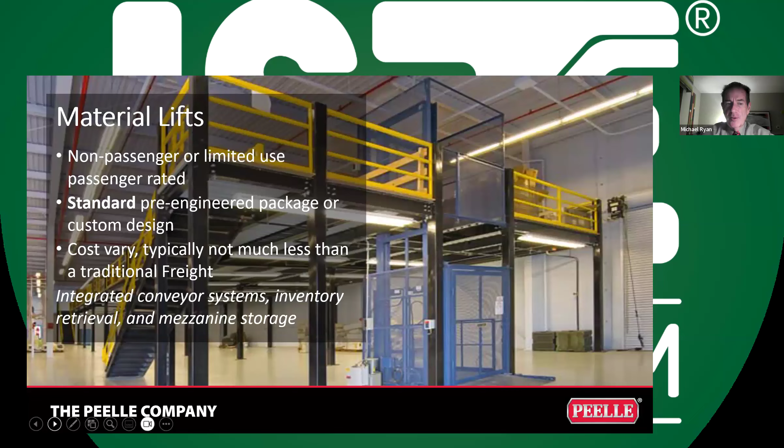Another option to move things is a service elevator or a passenger elevator. Again, these elevators are okay, but they are light duty. They are pre-engineered by the manufacturer. There are three sizes, there are three configurations, there are three colors, and they're very good at moving people. They might be good at moving light packages, but they're really not good at moving freight or things that could damage doors. And then there's the freight elevator.

So obviously, this is our wheelhouse. Freight elevators or goods lifts, they're very specific. They're application specific. What I mean by application specific is, a guy like TAC calls us and says, hey, this is how much of a hoistway I have. This is what I'm moving. This is how much space I have. This is how heavy it is. What do I need here? And then a company like ours says, okay, here's the biggest door, the best configuration for that application.

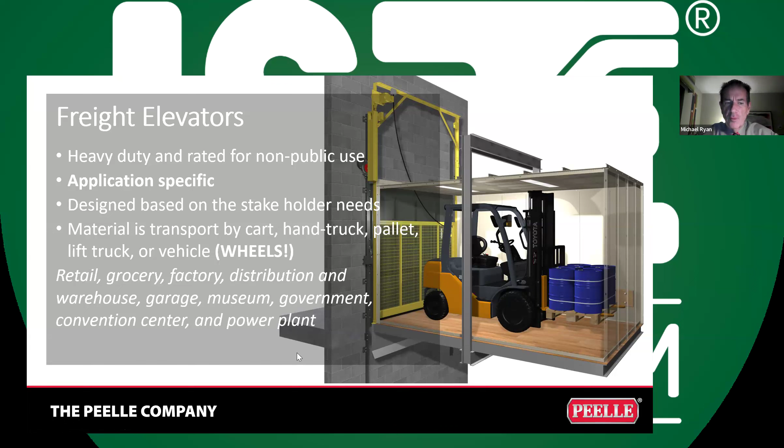And the most important thing for us about a freight elevator is we would say anytime you have a device with wheels, a forklift, a hand truck, a pallet jack, a car, a truck, anytime that you have something with wheels that can hit door panels, if they hit those door panels and those door panels are pushed out of the track, horizontal doors, things that you would see on a passenger elevator, that elevator is out of service. So maybe that wasn't the right door for that application. So that's where the vertical door really has great applicability.

So specifically, if you were to choose the vertical door, what values do you get from the vertical door? So we talked about where we're seeing the vertical door. We talked about who has to maybe supply or specify the vertical door, and what do you really get with the vertical door? So look, the vertical door all comes down to most shutdowns are related to doors.

So when you specify a freight elevator or goods lifts with vertical doors, it's because the owner, the tenant, the manufacturer, whoever's in the building wants the most uptime for that elevator. They can't live without that elevator. If those doors get damaged and they're out of service and they can't move their material, they can't move cars, they're really in a bad spot. So that's why the vertical door is specified. We want to maximize uptime. The material being loaded is heavy, or the class or the size of the material, and it's critically important that that elevator provide good use.

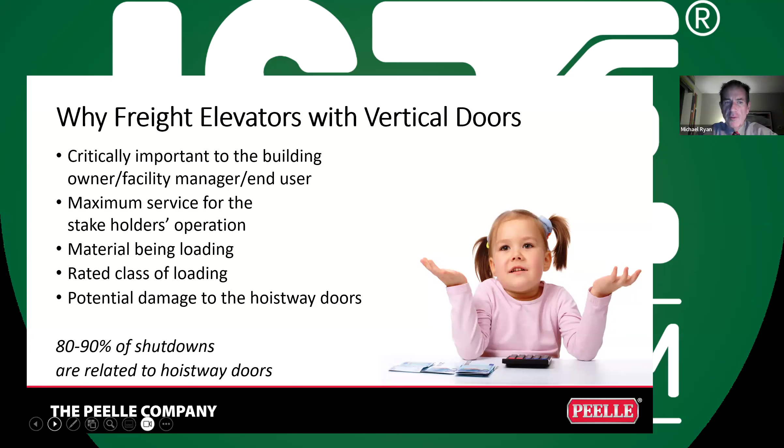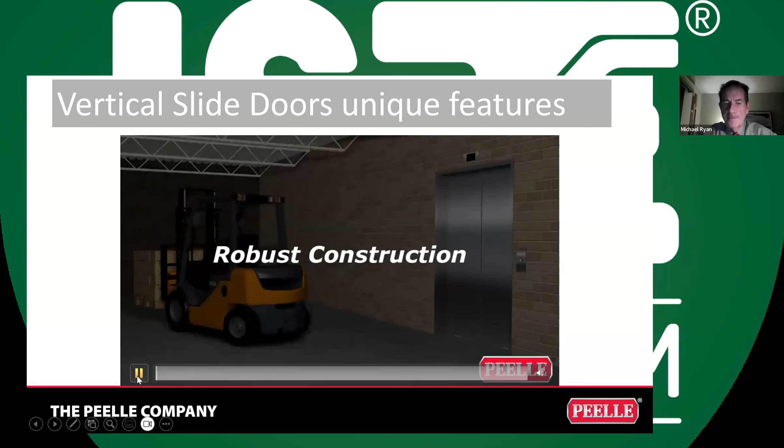So I'm just going to run a short video to show you the 6 major benefits that you get with a vertical slide door. Robust construction. Horizontal sliding doors are designed primarily for light-duty applications. This can result in damage due to incidental impact from loading, misuse, and abuse. Vertical sliding Peelle doors are designed specifically to the capacity and loading method of the elevator and are heavy-duty and reinforced to accommodate hand truck, pallet, and forklift loading.

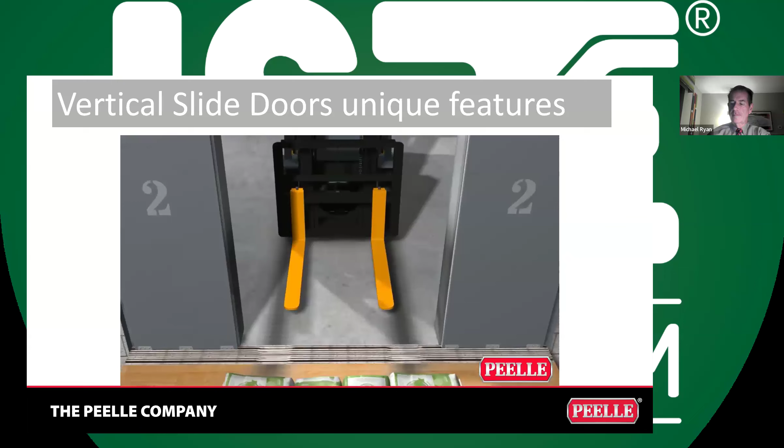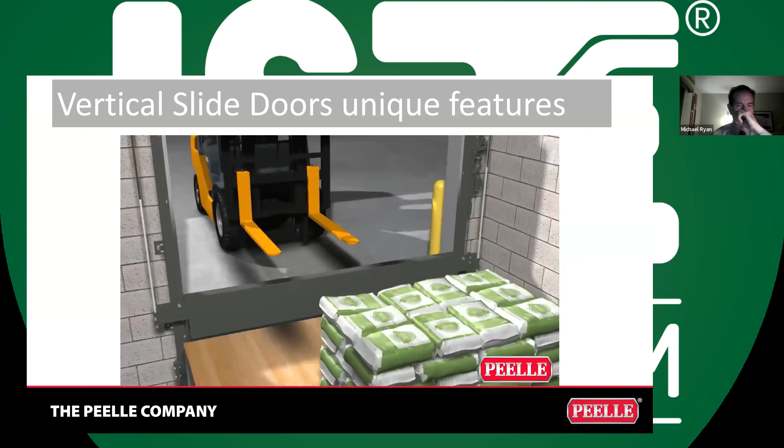Truckable sills. Horizontal sliding door sills are subject to damage, premature wear, and debris which affect door performance. Vertical sliding Peelle door truckable sills are designed specifically to the capacity and loading method of the elevator and are flat to allow smooth loading. Door guides are located in the hoistway, running vertically so they are not damaged during loading and debris cannot gather in the door guides.

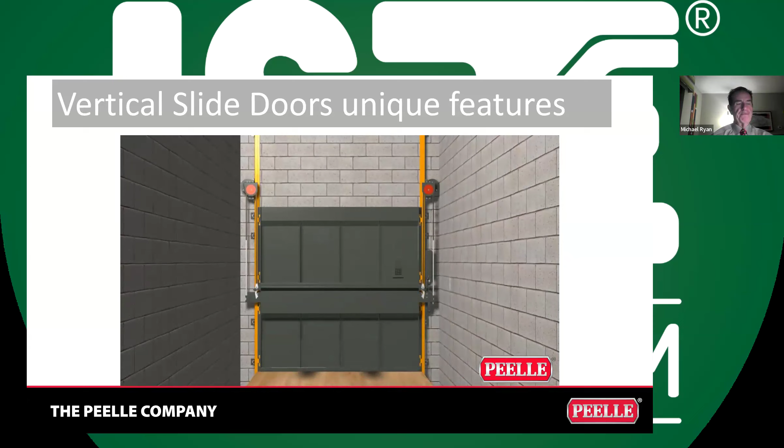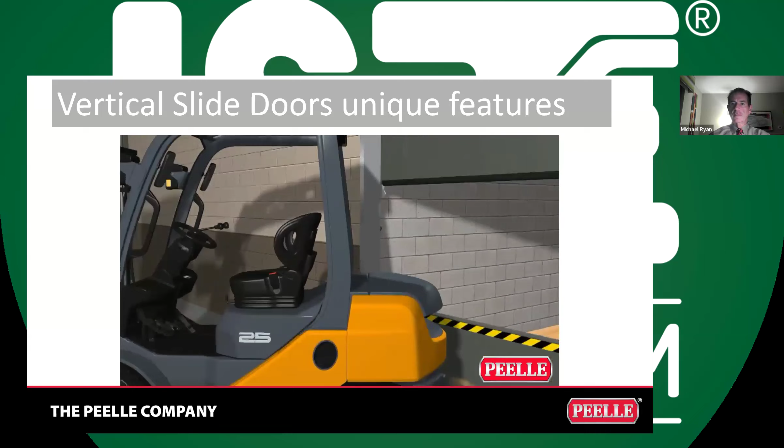Independent locks. Horizontal sliding doors, which sustain a high impact, may also suffer interlock misalignment, causing a shutdown. Vertical sliding Peelle door interlocks are independent of the panels and are located away from the opening, and thus protected on the door guides.

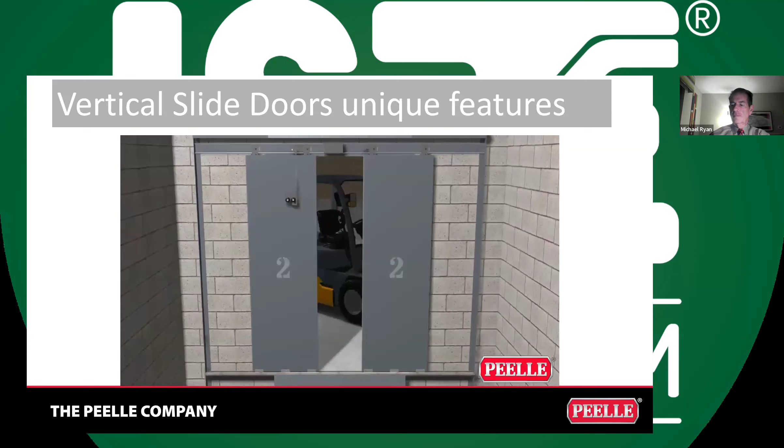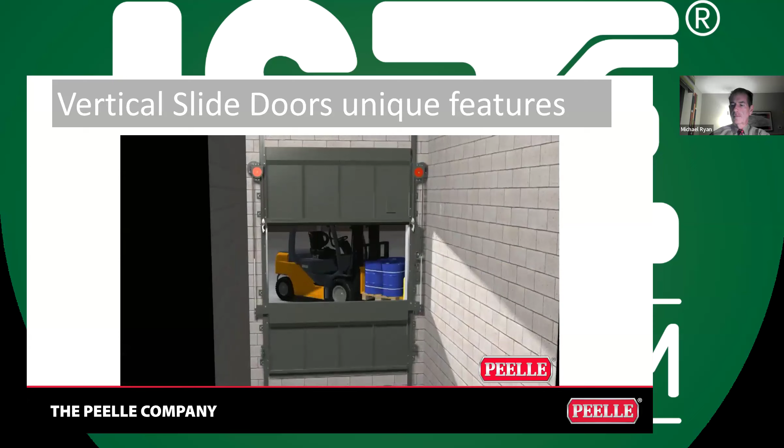Space savings. Horizontal doors require a large amount of return space for the panels. Vertical sliding Peelle doors typically require 13 inches or 330 millimeters of return space. This means more usable building space for the owner.

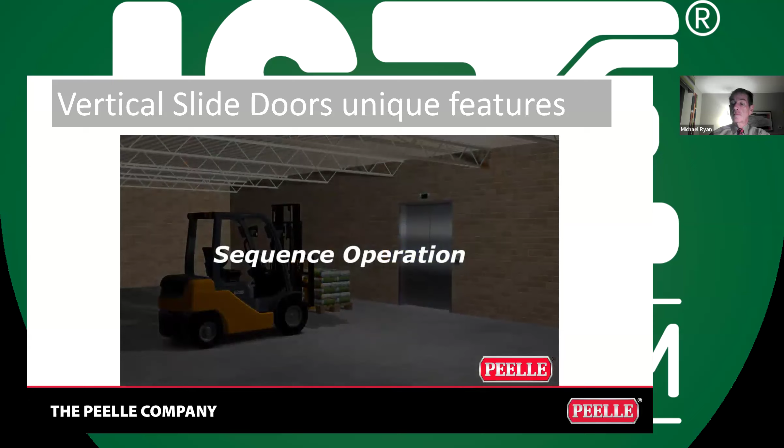Sequence operation. Horizontal doors are subject to incidental impact during loading when the entrance is not fully open, causing a shutdown. Vertical sliding Peelle doors permit loading only when the hoistway and car door entrance is fully open.

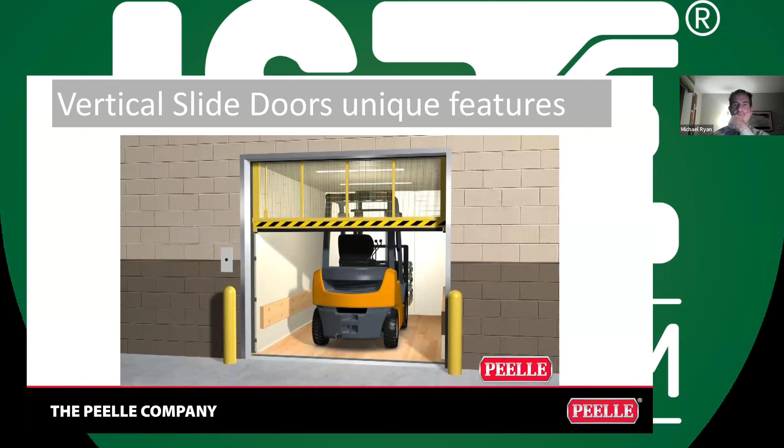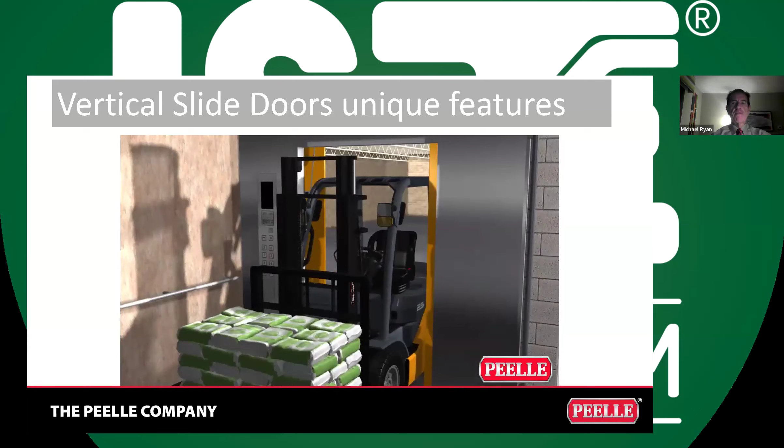Independent operation. Horizontal sliding doors have a mechanical coupling between the car door and hoistway door, which can separate during heavy-duty loading, causing an elevator shutdown.

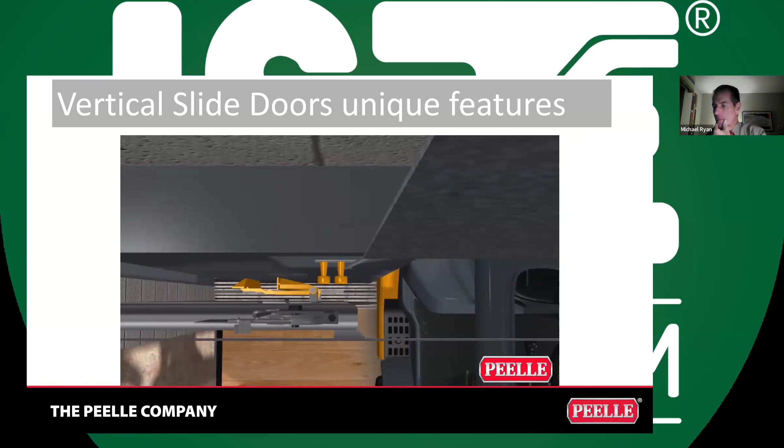Vertically sliding Peelle doors have independent operation with no mechanical coupling between the car door and hoistway door, allowing for heavy-duty loading conditions.

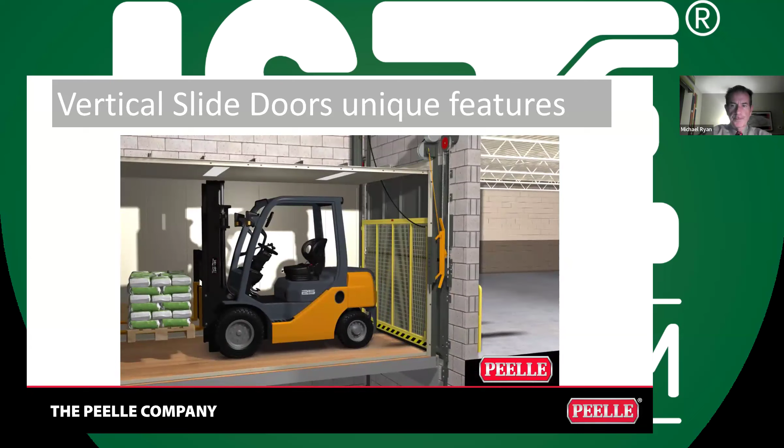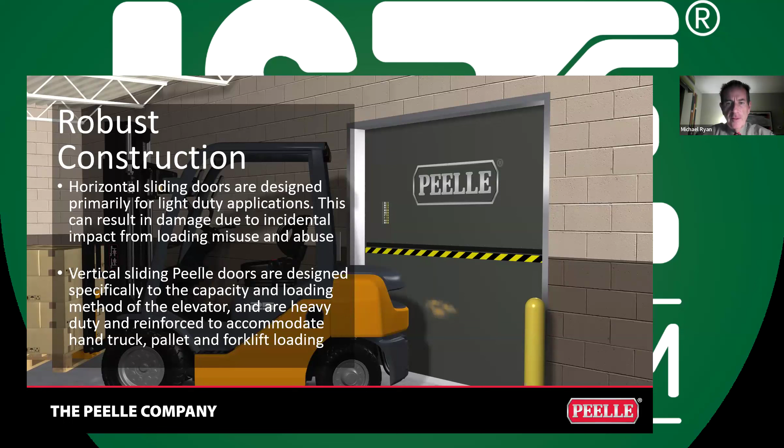Robust construction. All right. So just to narrow in on those again. So there's 6 things, right? Robust construction. Obviously, our door gets some heavy duty use. Therefore, it's made stronger. Lots of steel that you saw there in the video, but those panels are 12 gauge steel. The trucking sill is all steel. The trucking sill is suited for the capacity, the width, and the class of loading.

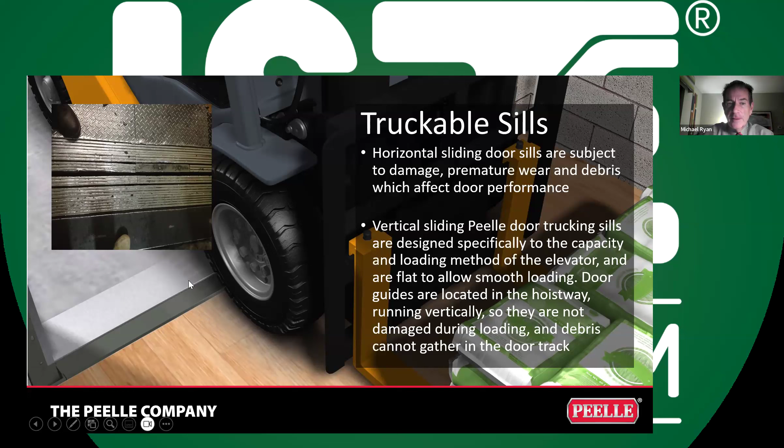You see here that here's a passenger sill. These sills over time, if this is a passenger elevator, this is a terrible sill, right? So there's a couple of extra pieces here. It's all jagged. When they wear and the doors can't close, you'll have an elevator that doesn't perform very well, at least doors that won't perform very well. Our door is meant for things to be driven over it. So it's flat. It facilitates the movement of freight.

We talked about the independent lock in the video. If you hit a horizontal door, a passenger door, hard enough, that lock mechanism, that clutch, the linkage between the car door and the hoistway door might not make. That means you have an elevator that's out of service. Our lock is on the inside. It's on the rail. It's very well protected. It never gets struck. You will never have an elevator out of service because of interlock damage.

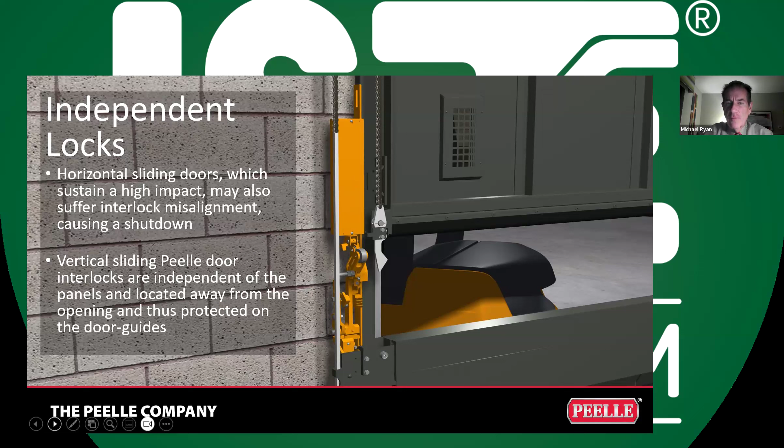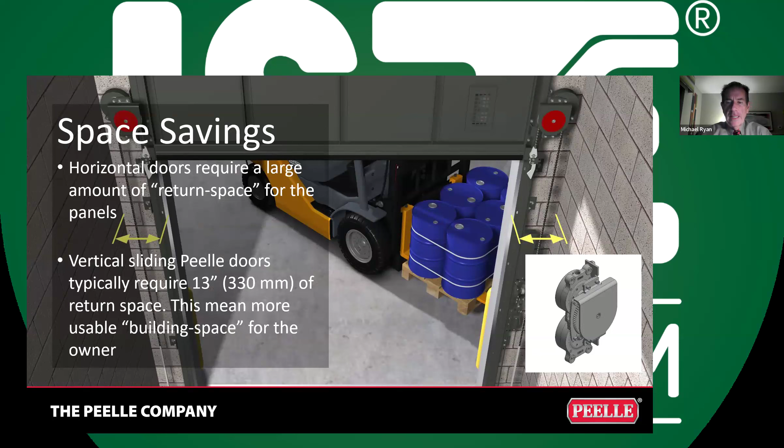We talked about the space savings. We only need 330 millimeters on either side. If you have a door that's a meter wide, it needs a meter to slide into the hoistway. So we save a lot of hoistway space for the owner.

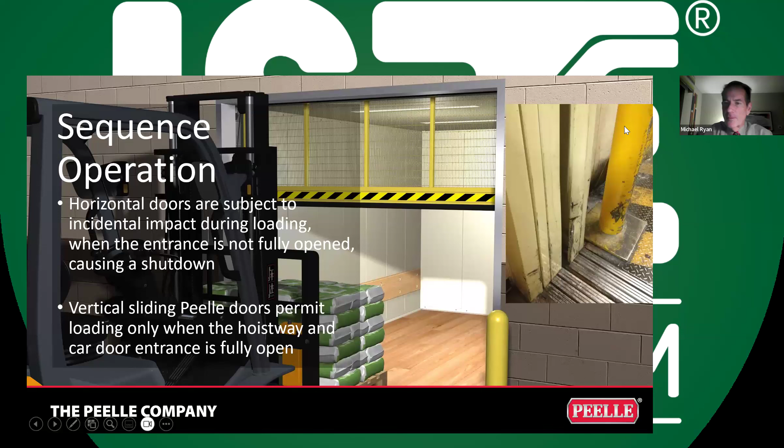Sequence operation simply means that the gate closes first and opens last, and it is the thing that is closest to the rider. So when the car gate or the car door, sometimes this is mesh, sometimes this is solid, when it is 2/3 closed, then the doors start to close. Same in opening. And because of that, many drivers of forklifts don't charge the opening. You can see the passenger elevator over here on the right, that damage to the bolster and the panels because it was charged by the operator of the forklift truck.

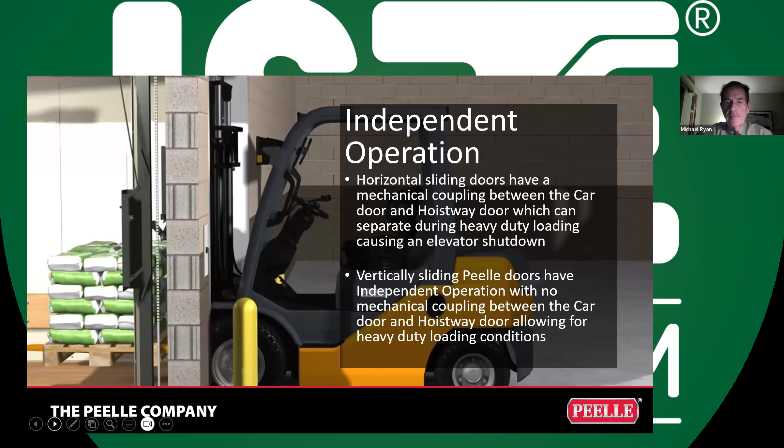And then the last thing was mentioned was independent operation. We don't link our car door with the landing door. They are independent operators, independent mechanisms. So when one is out of service, the other is not out of service.

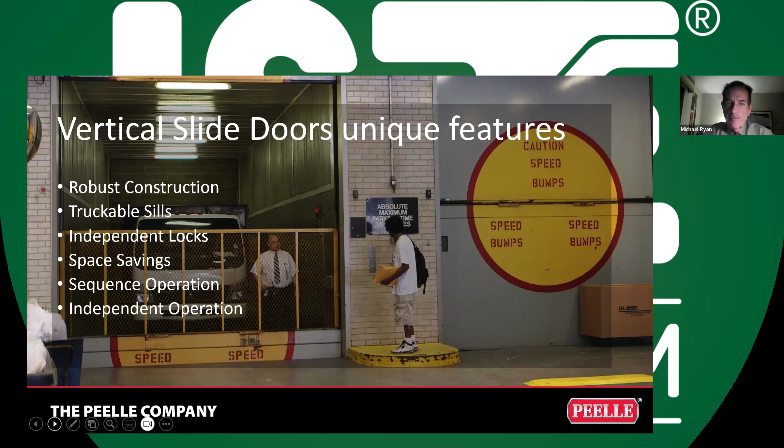So it really comes down to the vertical slide door's benefits over a horizontal door are really these simple 6 things. It's construction, it's flat trucking sill, it's independent, robust lock, the space savings, the sequence operation, and then it's independent operation. And then there are some things that are unique to the vertical door and some applications that it offers that you can't get with a horizontal door. So I'll just go over those quickly.

There are people who are concerned about the vertical door, its size, its safety features, and we've tried to address that as best we can. We've been doing this for 120 years. We operate globally. We understand that people might not understand the door. So all of our equipment now comes with safety labels that tell you how to operate it properly, safety labels that tell you where not to stand, safety labels that tell you what not to do.

Our unlocking device is a code-compliant unlocking device that is self-locking, self-closing. It's provided with the equipment. We double lock our door. Any door over 10 foot wide, which is, I guess that's in the 3-meter range. Any door that is greater than 10 feet wide, we double lock on both sides so it stays closed.

Our new controller, which is not new anymore, we've been selling it for 15 years, is wireless. Wireless gives you the ability to slow the door down to make it quieter. It has closed loop. It has a VVVF drive. It is green. It takes less time to install. It has a lot of great features. So we've updated the controls to match elevator controls.

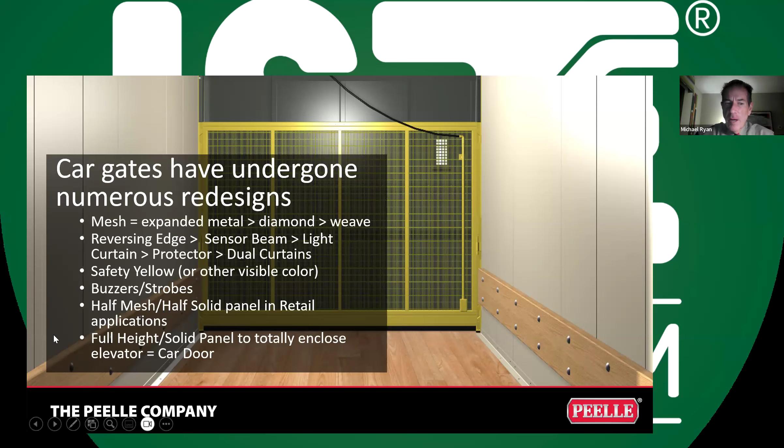All gates have a reversing edge, which is this boot on the bottom. In addition to the reversing edge, we used to offer a sensor beam, and now they are provided with light curtains or dual light curtains, depending upon the jurisdiction. We can make them very bright colors so that people see them. Buzzers, strobes. Sometimes this car gate is a solid panel. I'll show you that in a moment. Sometimes it's half solid, half mesh, but there are a lot of options because we recognize that that item is the closest thing to the rider and the freight.

When we have that situation, when we know that people will be riding in the freight elevator or the goods lift, what we do is that car gate becomes a car door. It is full height. It is solid panel. We hide all of the operating mechanisms. We put a gate lock with a battery backup on that device. We'll provide it with strobe lights, warning buzzers, light curtains.

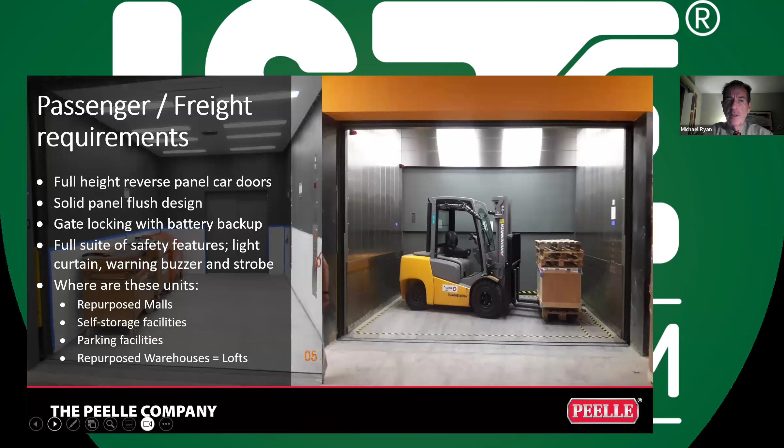And if you ask, well, where would that be? Where would riders be in a freight elevator or a goods lift? We see that in repurposed retail stores, self-storage facilities, parking garages where people are taking their own car to the parking floor. Some people are living in old manufacturing spaces and they're using the freight elevator as the only way to move within the building. So we've had to address that, and we have addressed that, and that is something that we've done in view of the codes.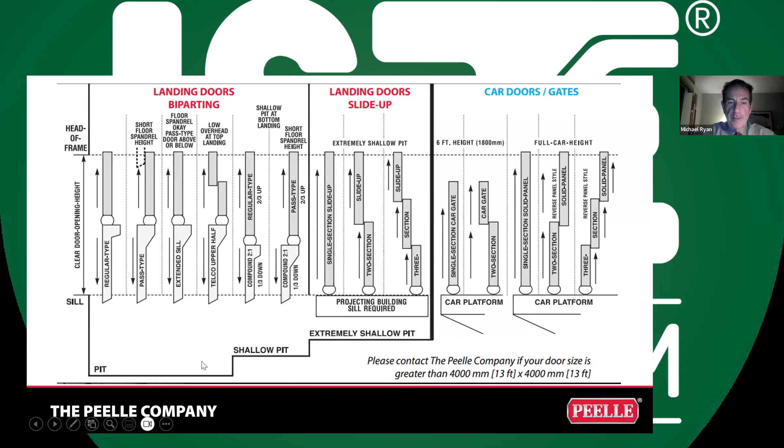These are not decisions that you need to make. You can talk to your elevator manufacturer. You can talk to your elevator consultant. You can confer with Peelle and just tell us, here's how much space we have. Here's the width, and here are the spaces between the floors. Here's my pit. Here's my overhead. And we will tell you which door fits in that particular floor. We'd be happy to do that.

So I thought it would be interesting to show you vertical door applications in North America and Europe. I showed you some cartoons. I showed you one picture when I started the presentation, but the next few slides are actual job applications across the globe that have vertical doors and the value that somebody must have seen where those were specified.

So this is a very typical application of the vertical door, and starting from left to right, and I've actually taken most of these pictures, so I know where these are. This is a parking garage in New York City over on the left. You never have one auto lift. You always have two in case one goes down.

But you know, you can't have a parking garage. You can't have a hotel with a parking garage. You can't have a condo building with a parking garage unless you have two elevators in case one goes down. And that's pretty typical of what you see here. So here's two auto lifts side by side with vertical doors. And you can see that these are traditional vertical doors where one half slides up and one half slides down.

The middle picture, this is the CBC building in Toronto, Canada, and this is a truck lift. This truck probably delivers food. There might be a garbage truck. It would come in from the street. It would go down to whatever level, unload whatever it has to load. But you can see that this is a very large auto lift, truck lift application.

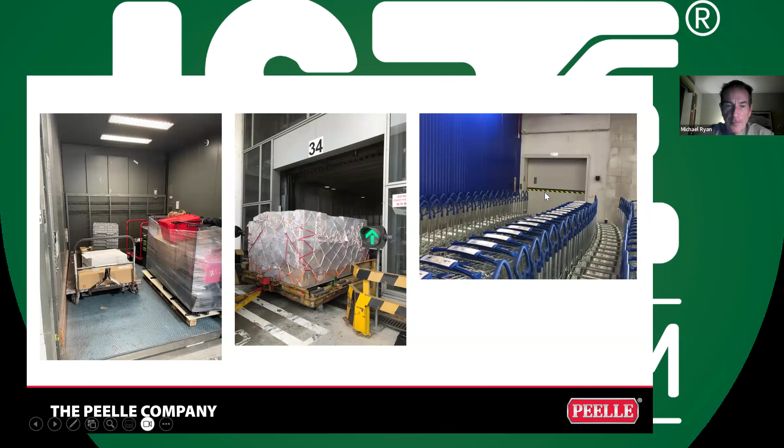So this would be very typical in North America. Anywhere there is food processing and there's a freight elevator with vertical doors, the entire door would be made out of stainless steel.

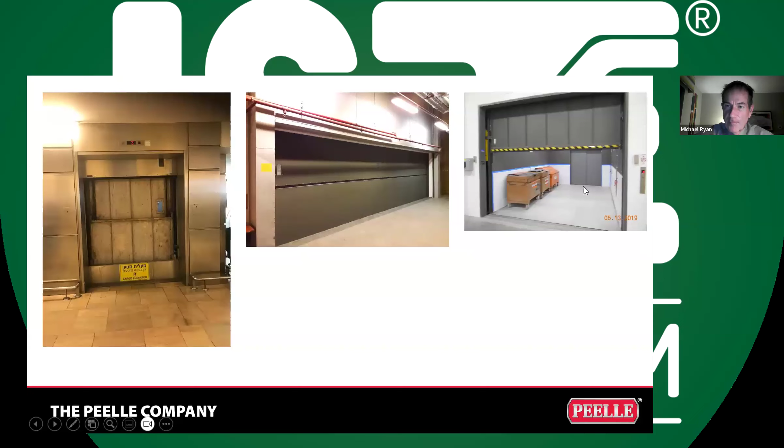And then I thought this project was interesting because you're definitely seeing a freight elevator and you're seeing the car door open. But what you're seeing in the background is a passenger entrance, a horizontal door. So on this project, what Peelle provided was freight elevator doors, vertical slide doors on one side, and then Peelle passenger doors on the opposite side. So that's an interesting application.

And then my last slide, these are doors that slide up. This is a truck lift in London, and this is the vision panel. So if you can imagine, you would be standing here looking inside. This door is also probably about 6 meters tall, and you can see 1, 2, 3 panels. These 3 panels slide up, and then the truck goes in and out.

This middle picture is biparting, but the upper panel is in 2 pieces. So the lower panel slides down and the upper panel slides up, because you see the vision panel, this is only about 6 feet or slightly less than 2 meters. And the last door, again, you have to be able to look out this vision panel. So if this is less than 3 meters, this is a very small opening, but all 3 panels slide up, which means there isn't adequate overhead for vertical biparting. Easy to do. It was the application we were charged with, so that's what we provided.

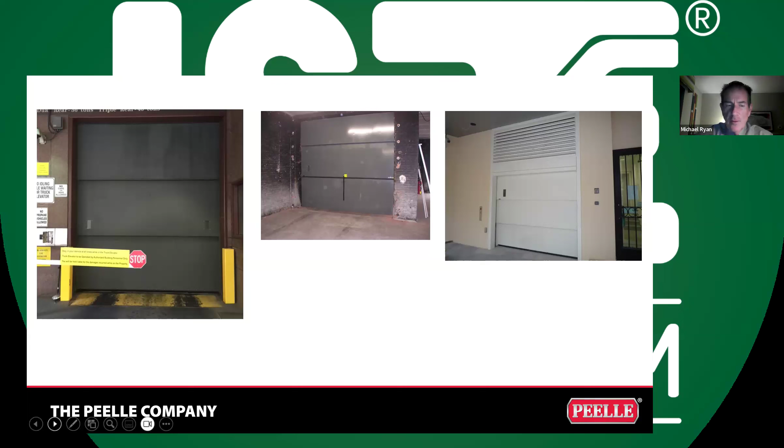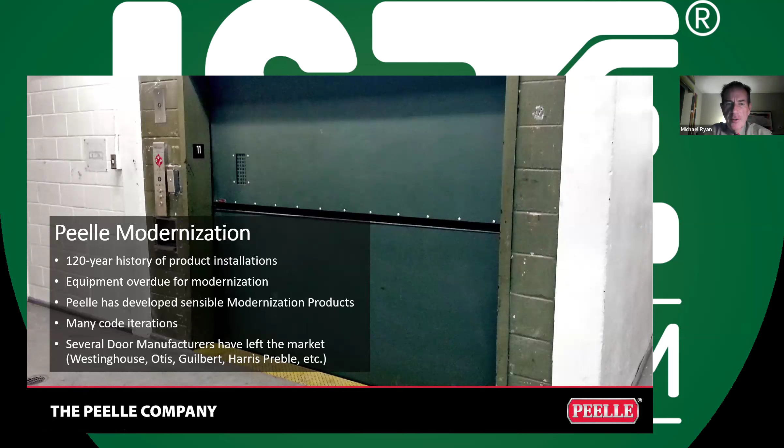All right. So the last section of the video, just in case people were curious to know, what happens to the vertical doors as they age and need to be modernized? Very common question. Again, we're 120 years old, so it's a question that we're very familiar with. We have made this door for 120 years, but there have been many other manufacturers of doors. I don't know how many of those are in Asia, but for sure there are older Otis doors all over the world. And I just wanted to walk through for a few minutes what we can do, and then I'll turn it back over to the group for any questions.

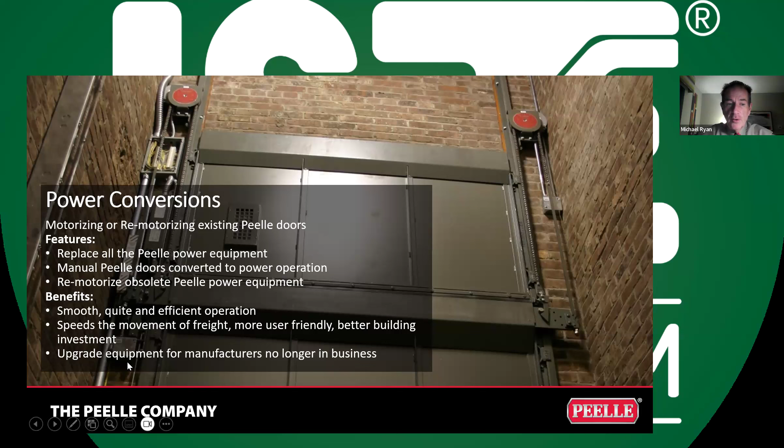So it is very common, I mentioned it once or twice, for Peelle to remotorize our own power doors when they are not performing as well as the customer would like. Or we can easily motorize our manual doors. Most doors today are power operated, but there are some applications where the doors are operated by hand. If that's the case, we can come in at a later date and motorize them. Very often, we also come into our own motorized projects and remotorize them with updated equipment. That makes it code compliant, easier to operate, allows you to upgrade to maybe a wireless control, but it is a very common thing that we can do.

As doors get damaged, because doors do get damaged, even our doors that are very heavy duty are not impervious to the blades of a forklift. If a forklift truck operator makes a mistake and decides to spear the door, it's no longer fire rated. So we can just replace that panel. You don't have to replace both panels. We can just replace the panel that's damaged.

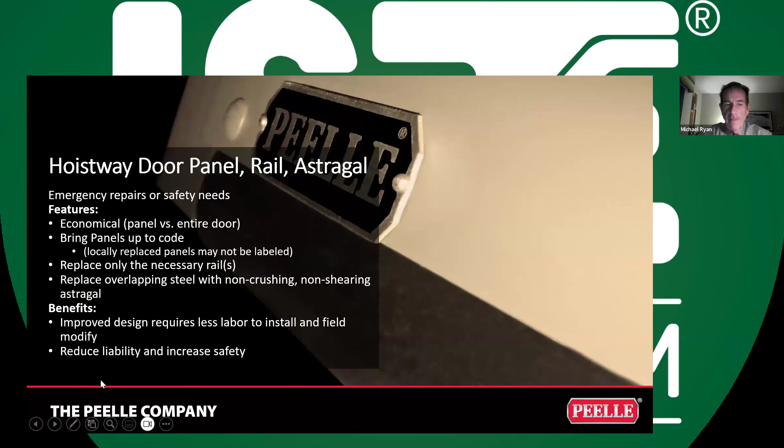I don't know if it's obvious to you, but this black thing here is what's called an astragal. It is the thing that is between the upper and lower panel. It sometimes gets damaged or cracked because it ages. We can replace just the astragal. We can replace just the door rail. So when you have vertical doors on a freight elevator, and they get damaged or just need to be upgraded, you don't have to rip everything out. You can just work on those doors that need to be replaced or repaired.

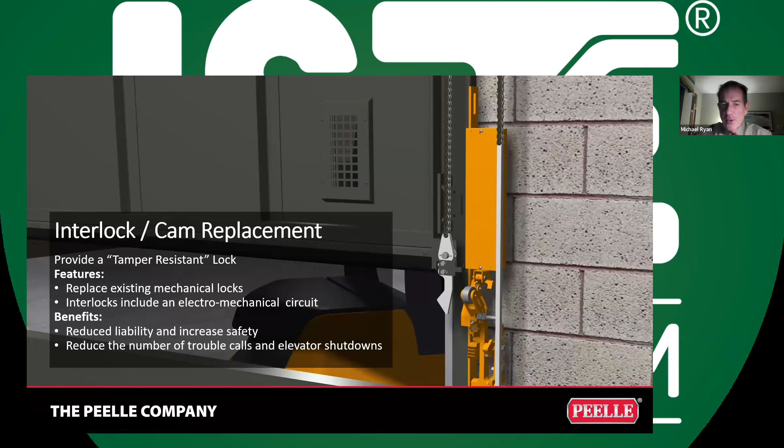Sometimes that interlock we talked about gets tired or old. The interlock works with the cam. It's not uncommon that we replace the interlocks and the cam. Every door has an interlock. So if you have a project with 3 doors, there are 3 interlocks, and there's one cam that rides on the car that actuates that interlock. So sometimes those are replaced.

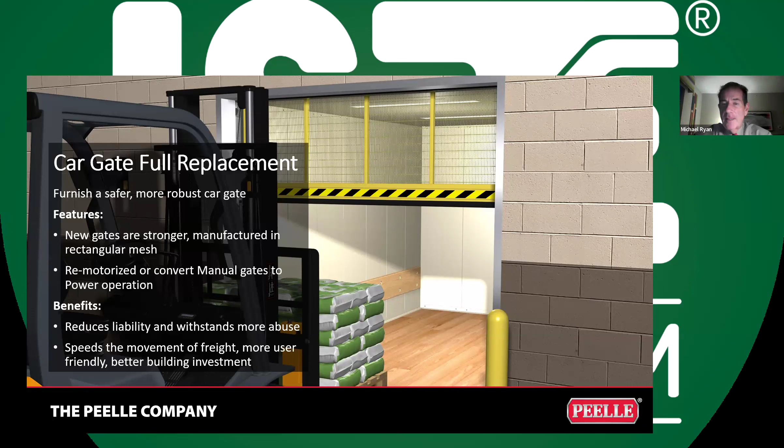I talked a lot about car gates and car doors. We are often called by customers because the car door or the car gate is an older style, or it doesn't have the safety features it should have, in which case we leave the landing doors and we just replace the car door in its entirety, which means the car door panel, the rails it operates on, the operator, the car door lock, the counterweight. So that is a very common modernization.

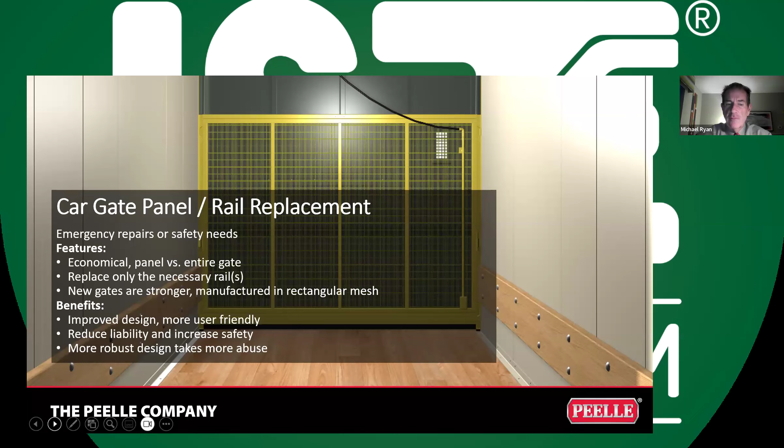And then sometimes we're called because we just have to replace the car gate panel, because it's been damaged, because it is the thing that's closest to the rider and the freight. So it takes a lot of abuse. So that is a very common modernization. You don't have to replace the whole thing. You can just replace the panel. Sometimes we have panels that are half solid, half mesh. This is a very popular gate in the retail operations here in North America, most notably with Target.

We offer our reversing devices on our car doors and car gates that weren't originally furnished with it. In that case, they were only provided with a reversing edge on the bottom of the car door, so we can come in at a later date and put on light curtains.

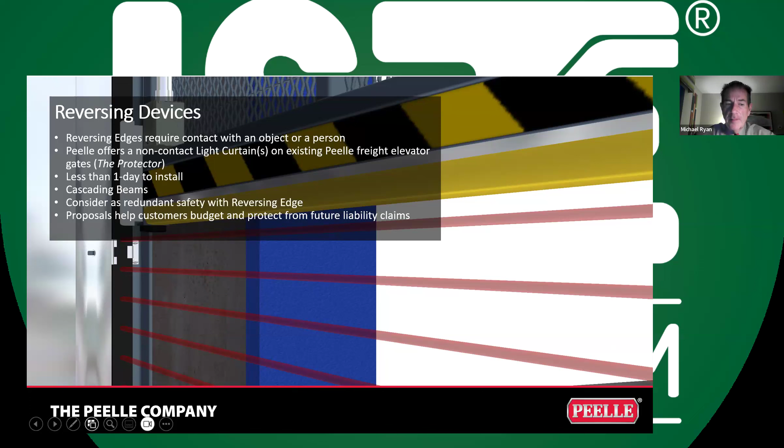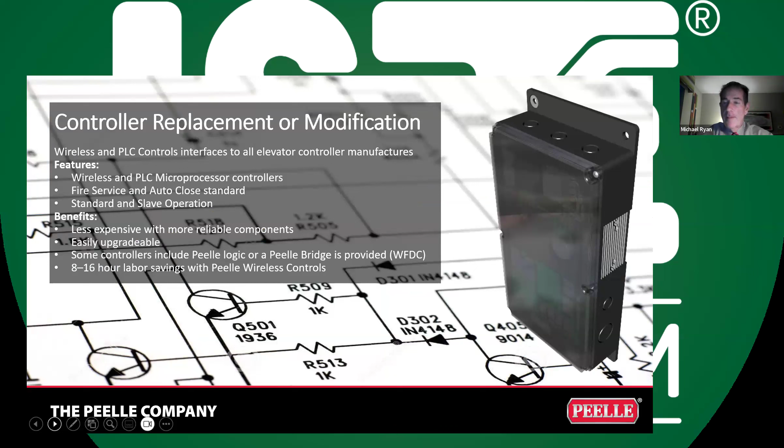If you have an older Peelle existing job and the controller is of a vintage that needs to be replaced, your elevator consultant said, hey, this is relay logic, it's got to go, or hey, this is a PLC, but Peelle's got something better, it's wireless. We can come in and just upgrade the control system. That is not a difficult thing to do.

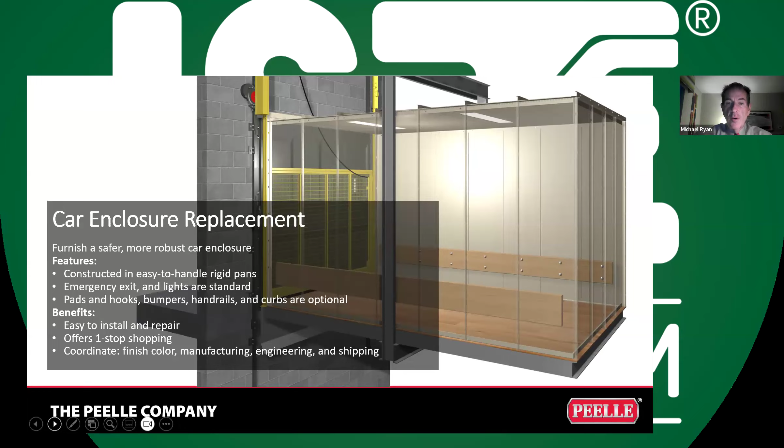And because we make a very robust landing door, we make a very robust car enclosure. So our car enclosures have interlocking panels. They can be provided with bumpers and lights. We understand that if you're going to have a freight elevator or a goods lift, it's going to take a lot of abuse. Therefore, the car door and the car enclosure is also built that well.

So my last couple of slides are here. If your facility needs sales training, either something that I did or something more technical, that is something that we welcome the opportunity to do. If consultants want assistance writing a spec, we have sample specs. We have sample layouts that you can show to your owner, your tenant, what the freight elevator with the vertical doors looks like. Those job prints are free.

We coordinate with your other manufacturers. We don't make the elevator, but we coordinate with your elevator manufacturer. We coordinate with your consultant. We're obviously coordinating with the elevator contractor. We offer installation, maintenance, and troubleshooting training. We understand that this door is not popular there in Asia, but we can provide remote training to make people more comfortable before it gets installed.

Obviously, because we sell globally, logistics, crating, warehousing, coordinating with your freight forwarder is not uncommon for us. We provide free technical support from our factory. And obviously, we've been in business 120 years, so we have a very robust parts replacement and component replacement mechanism in place.

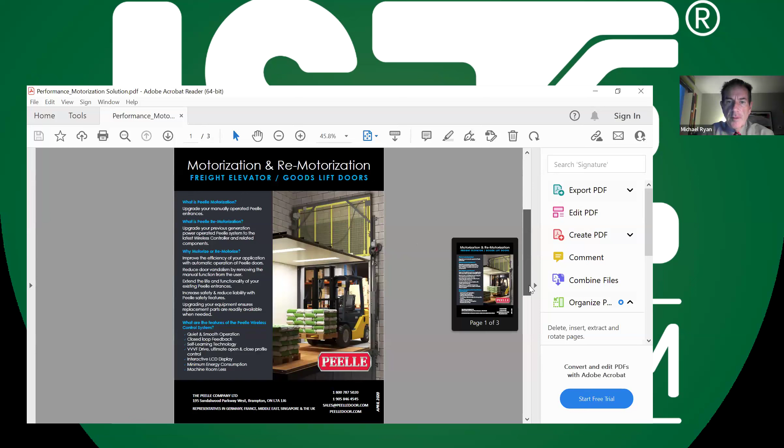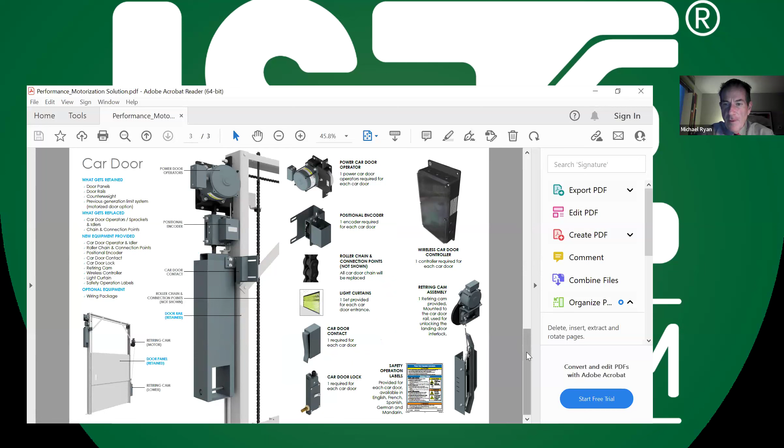What you're seeing here on this pamphlet, here is the wireless box. Here is the interlock. Here is the unlocking device I mentioned, chain. Here's the encoder, and here's the sheave and operator that the chain drives over that moves that door. And here's a little bit closer look: this is a counterweight when the doors slide up. So we talked a lot about slide up doors. These two doors slide up in the up direction, so what would be different is that it has a counterweight in that case. So that's probably the best picture I can show you for how the door is driven.

Okay, I'll stop. We can move to the next question, which is a smaller one. Are these elevators certified by a competent person? A competent person, yes. Well, look, we're the door guy. I know that most places in the world there's an enforcement body that takes a look at the elevator. Maybe this is something unfamiliar to this person, but this product is very common in some places.

And yes, of course, the door and its components are put on elevators, and all of that is not only certified, but it is approved by an inspector when it gets installed. It is put in by elevator professionals. So this is not a product provided to fill a small niche. It is a very legitimate product with a long life. And in North America, we have lots of code people. It spends a lot of time in committee on what is appropriate and safe.